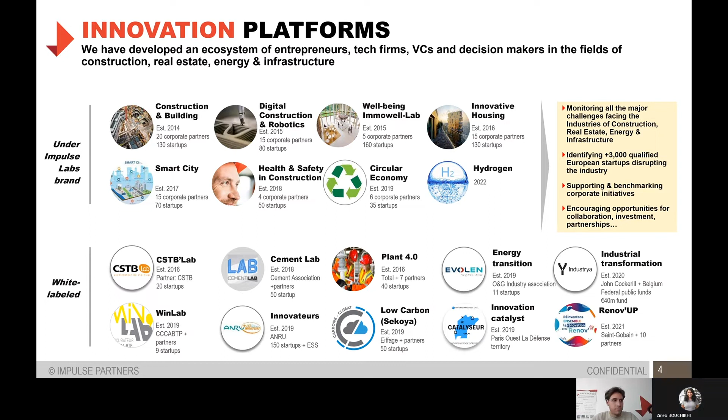We work with an important international industry leader group, and we've gathered over 3,000 startups that we help grow and accelerate their go-to-market strategy. So part of our job is really to bring together the whole value chain across geographies, hence why we're here today and why we created these Impulse Talks.

In today's session, we're lucky to have over 60 participants coming from 20 countries. So we really thank you for being here and taking the time to gather around such an interesting theme.

In today's talk, we're happy to have with us very interesting companies that are transforming digital construction. We'll first hear from Kurt Zeidler from Gall Zeidler Consultants, and then we'll have 5-minute presentations from 4 entrepreneurs based in Germany, Norway, and the UK. We'll finally close this talk with a few minutes dedicated to Q&A. To do so, do not hesitate to use the chat to ask any questions you might have for our guests today.

So we're glad to introduce you today to Kurt Zeidler, principal and co-founder at Gall Zeidler Consultants, an international engineering consultancy specialized in solutions for tunnel and underground schemes. If you have any questions during the presentations, feel free to ask them in the chat, and we will bring them up at the end if we have time. So please, Kurt, you can start introducing yourself and the company.

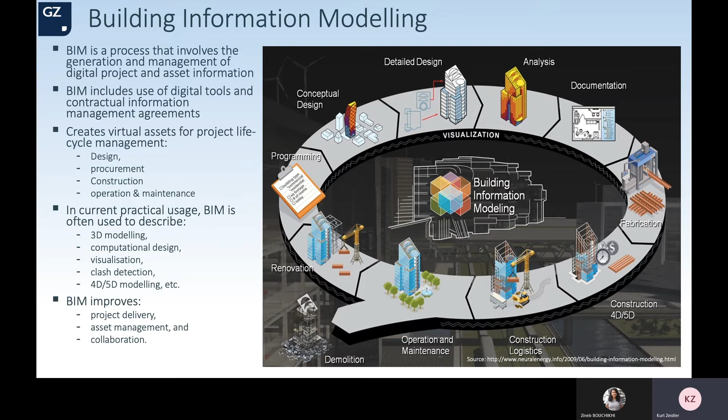It goes into clash detection up to 4D and 5D modeling, which is being used at some projects around the world. What BIM offers us is an improvement in project delivery, in particular delivery certainty, but also in asset management and in collaboration between various different trades during construction and before that, various different disciplines.

In the UK and in Europe, BIM is implemented more strictly following ISO 19650, which is a guideline for the procedure, for instance, storing all the information in a common data environment.

The common data environment is not just a dump for information and files. It's important to structure and organize it and manage it such that information can be obtained in an efficient and reliable way. It's basically a source of truth about the project.

If somebody looks up information on this common data environment or data storage, he must be able to rely on the information and that this information is the latest information. So that's all part of the management, and that's also guided by the ISO.

It also shows the procedure for a federated scheme, which is very important. A federated scheme means that all information flows together and is built with a 3D scheme, for instance, into a 3D model. So it's not only the 3D model itself, it's all the assets shown within the 3D model.

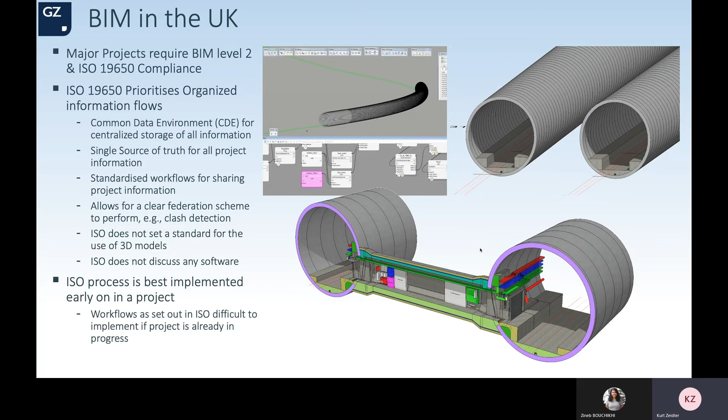But it requires a workflow, and it requires that workflow from the very beginning, and it requires rethinking about these workflows on all sides - on the client side, owner side, as well as the engineer side during design and during construction.

In North America, BIM is very often used. Many owners are still not using BIM, but some owners implement BIM sometimes at a relatively late stage in the project, which unfortunately doesn't provide the most benefit of BIM, but still uses parts of it, for instance for clash detection or for information on environmental situations and so on.

So there is a slightly different understanding, or different use of BIM in the States, but ISO is still a basis for all those approaches.

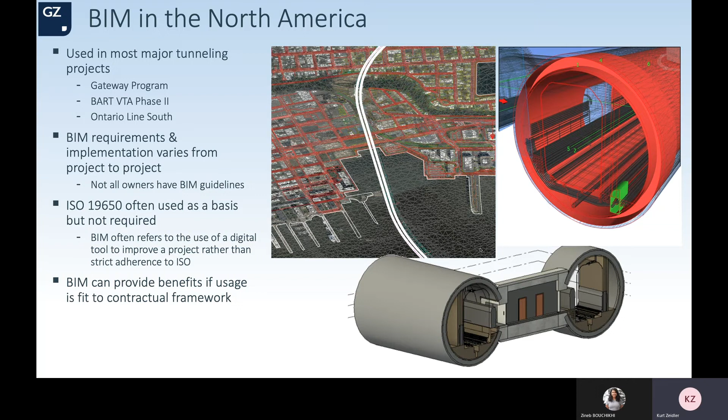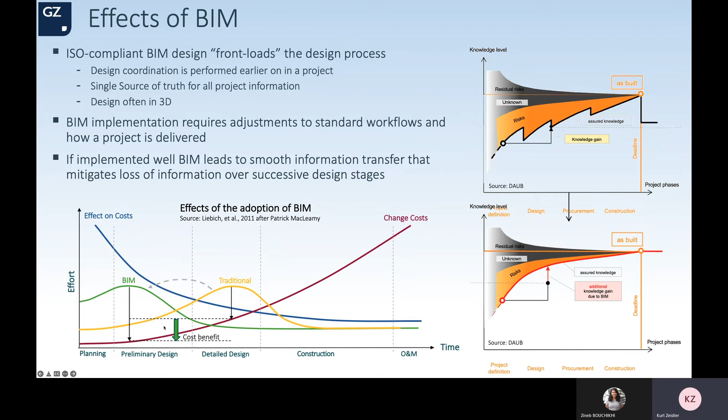So the cost benefit of BIM is that these changes, the errors, should be found relatively early, and the changes implemented early in the life of a project, where changes are relatively simple - by changing models, by changing digital information, rather than changing material out there or changing beams or something like that.

Another example is the use for clash detection. This is an example from a project in North America, where the client decided well into the project that he wants to use BIM for clash detection of his structure, and he wanted to bring all the architectural, structural, and other models together in a federated model, showing every element of the project and structure. Then through regular coordination meetings, find out clashes and problems where one discipline is affecting another negatively, or where a trade might come in later than required because it should come in earlier to do its work. So that's one understanding of BIM as well.

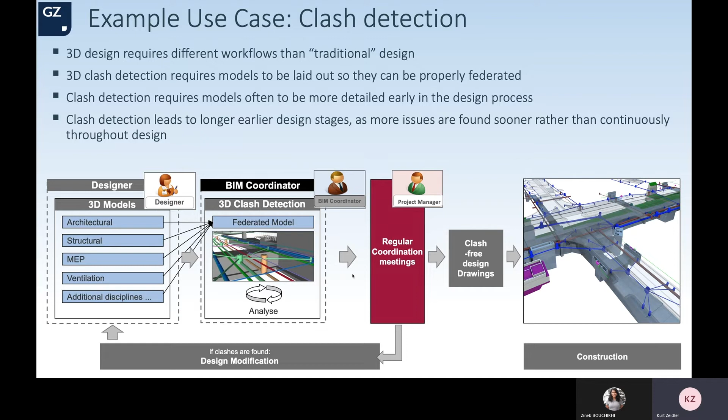We will have, of course, increasing computer power. We have all seen that rapidly developing in the past, and that will find its way into BIM modeling and improve it. Software developers continuously develop new software to more efficiently and powerfully use BIM models in future. But on the other hand, it needs standardization of BIM modeling, and I think that's probably a major task for the near future for engineers and clients, to standardize those procedures to make the best use of BIM.

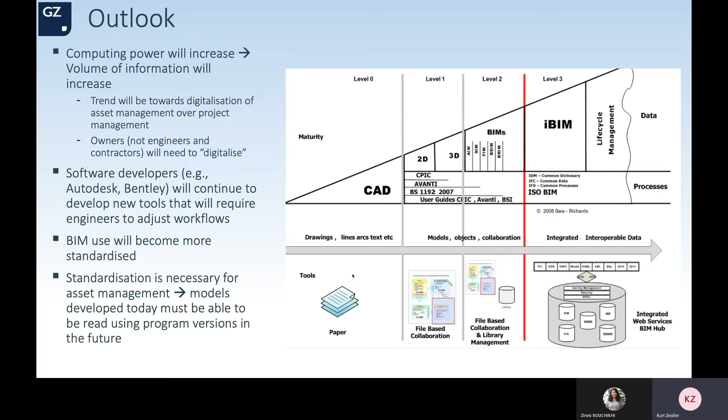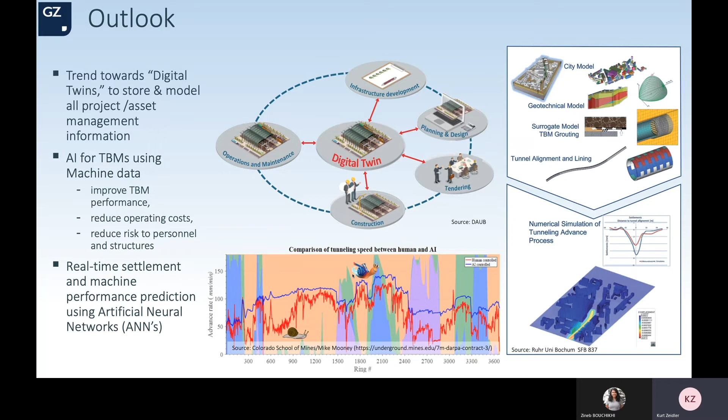As I mentioned at the beginning, there is more than BIM. There are other digital tools in construction, such as using real-time settlement monitoring and real-time monitoring of the performance of a TBM, which can then be used with the support of artificial intelligence to predict certain behaviors, to predict the performance of a TBM or predict settlements based on real monitoring data. That's important - it's not based on assumptions, it's based on real monitoring data. And that's certainly a very exciting part, only one part of the digital world which will be influencing the future of our construction.

So thank you very much. I hope everybody found something interesting in this. And I think that's it for my 10 minutes. Thank you.

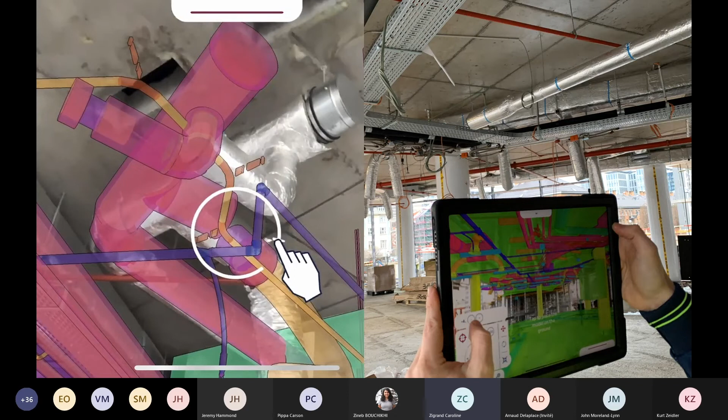GenieVision is a SaaS software solution that allows you to benchmark the 3D model against reality thanks to augmented reality - a virtual layer, the 3D, that interacts with the construction site, not only via a visual object but also via the data behind those objects, thanks to a mobile device. So the idea behind that is really to pocket the 3D, take it out from the design and conception phase, and build profit for the project stakeholders.

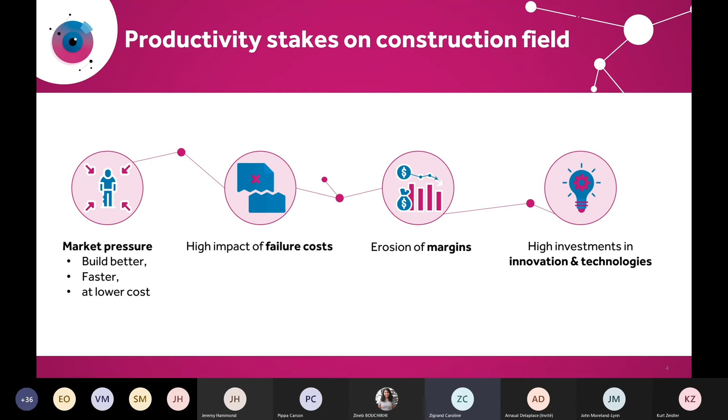So the project evolved keeping in mind the productivity stakes on the construction field. We understood clearly that there was market pressure to build better, faster, at lower cost, with high impact of failure cost, eroding margins, and also high investment in innovation and technologies, talking also, as Mr. Zeidler said, about BIM innovation. So talking about failure cost, we understood that there was a big part of the construction budget allocated to error management.

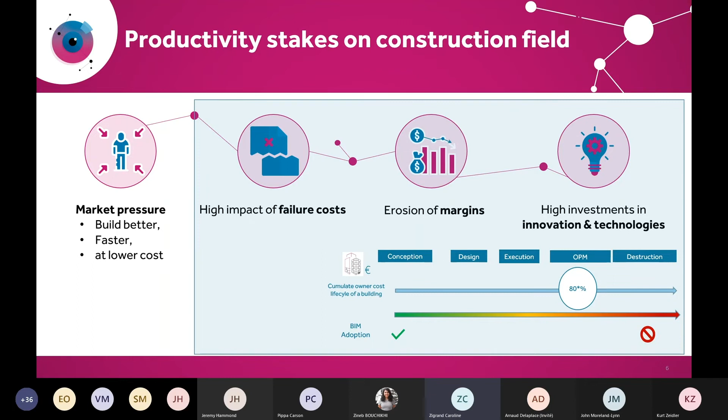And talking about BIM, we understood also that there was very good maturity at conception and design phase, while at execution and operation and maintenance, it is very low. And indeed, it is at that level that, if we look at the overall budget of a project over its life cycle, it is the most important. So GenieVision is really there to help slash failure costs and optimize BIM investment.

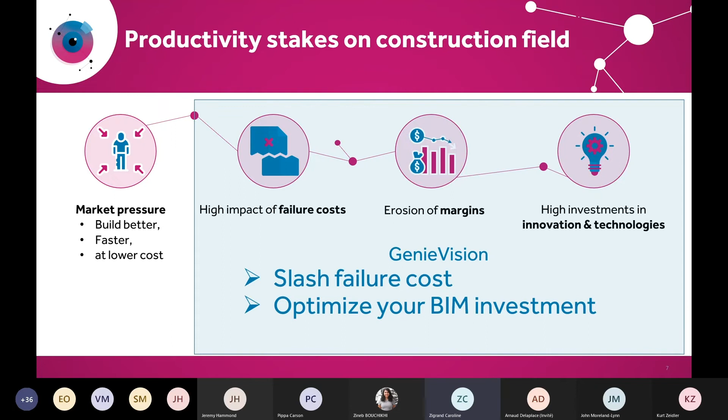This is done thanks to this smart viewer that is used for the entire life cycle of the building, from conception to operation, putting the solution in the hand of a modeler, site foreman, engineer, PMC, BIM, and operator. And we do it mainly based on three types of use cases.

The first type of use case is the possibility through our solution to monitor the execution, so make sure that what is executed is perfectly aligned with the model itself. We're not talking about 2D here, it's really the 3D. Make sure that the execution and installation is done correctly.

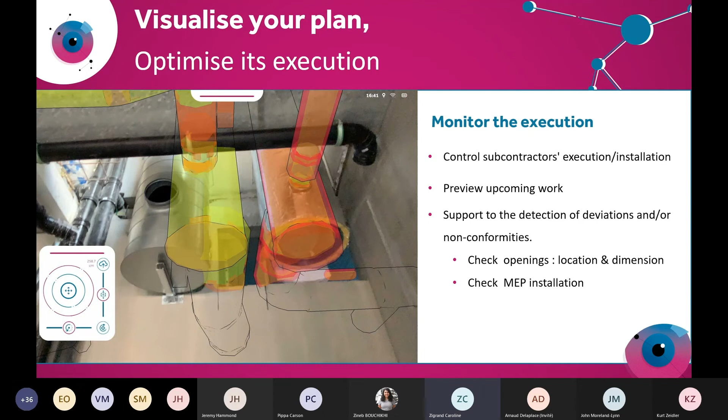Be able to preview the upcoming work and make sure there are no physical clashes, no clashes with the planning, and monitor all kinds of deviation. For example, in the openings: are they at the right place, correctly sized, is the number of openings correct. So it's really there to visualize the plan and optimize the execution.

The second type of use case is really the other way around: monitor the 3D model against the reality. There it's really about making sure we build a correct as-built and enrich the model based on better coordination. Let's take a concrete example of refurbishment of a project.

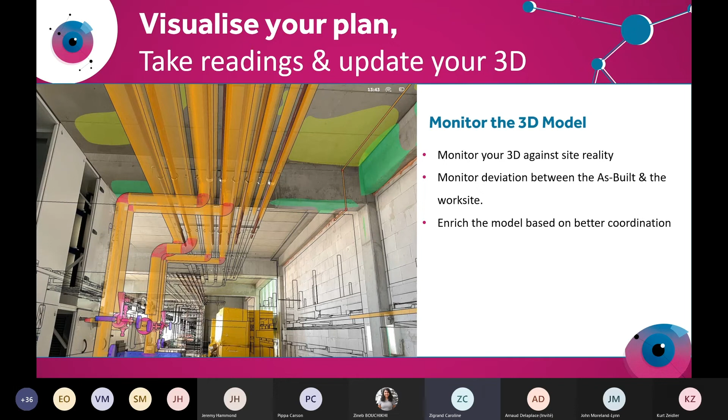We have created a 3D model thanks to scan technologies and so on, and we want to make sure we have the right model to then do the right bidding, the right assessment, the right coordination on site, and that we do not miss anything.

The third type of use case is collaboration and follow-up. Via GenieVision on site, we collect a bunch of information: visual, pictures with the 3D against the reality, the place where those pictures were taken, timestamp, who created it. This can be used to share information among teams, and also connect that information directly to the 3D model.

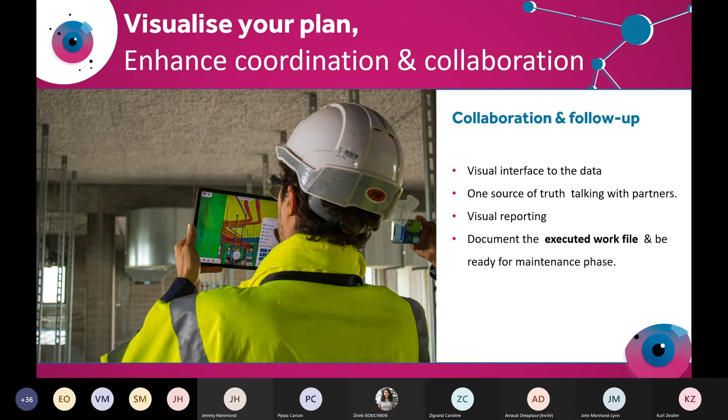So GenieVision's process is quite simple. You have a 3D model that you place on a portal, process it, and make it available through an application for the operator on site, who records the model, calibrates it, and does the reporting job by comparing the reality 3D and the on-site reality.

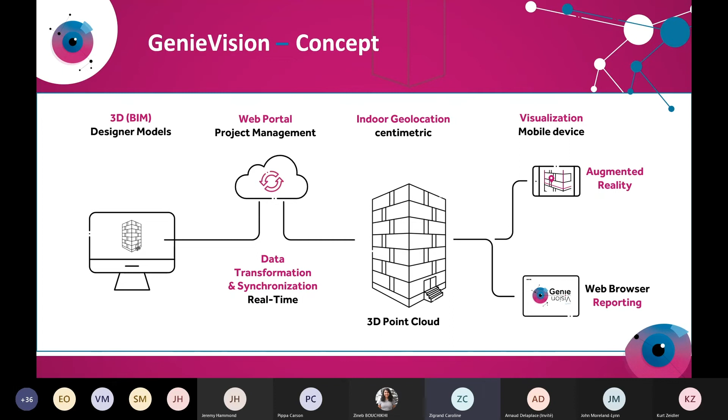Afterwards, everything that has been collected is available through the application and through the portal. Behind that concept, there are processes bringing 3D into augmented reality thanks to a unique high-tech process, avoiding any problem of sizes and using different types of format. The main ones are Revit and IFC.

We also make sure GenieVision is focused on its core product, which is the smart viewer, and that we are integrated into the existing ecosystem of our customer by providing an open solution that can be easily integrated with what already has been implemented on the customer side.

So if we take back the question raised at the beginning, we understand that this kind of solution via the smart viewer allows us to carry the 3D on site, benchmark this 3D against the reality, make sure this 3D conforms to what work is done, confirm the execution, and deliver at the end a digital twin that can benefit the project throughout its life cycle.

So it is done thanks to augmented reality, but we have in mind that we can go further with other embedded technology coming soon. So do not hesitate to ask questions at the end if you have any, or to contact us. Thank you.

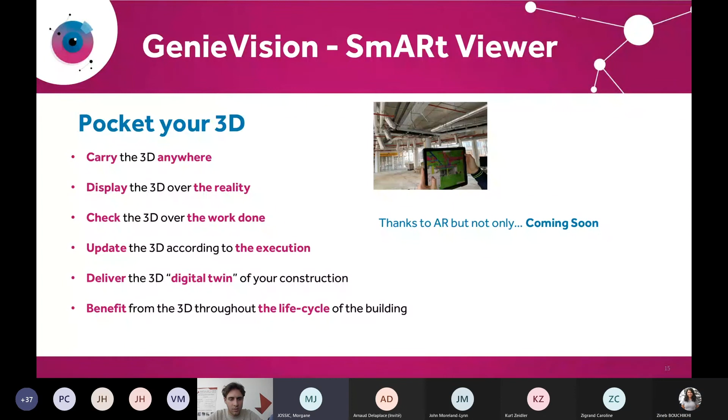Do you still see my screen? I will share it again. No, we can't see your screen. Currently it's blocked. Do you remember what the slide is, the slide number? Yeah, so here.

Okay, so our customer, for the moment, we are really focusing on talking to site foreman and engineer, allowing the site foreman to do, as I said, the first type of use case: be able to control what has been executed on site, do snagging, report any kind of non-conformities, and afterwards push it into a work progress flow.

And the second type of users that we have focused on is the engineer working on the BIM, who are looking in their mission to support either the customer or the general contractor to have an up-to-date as-built. So that's the two main focus for the moment.

Of course, we can even go further and help the user in the operation and maintenance phase, helping them get access to the data we collect throughout the previous phases, and also, thanks to the 3D model, be able to locate where the different installations are, access visually what is behind the wall or behind the ceiling, and access the data linked to those different objects.

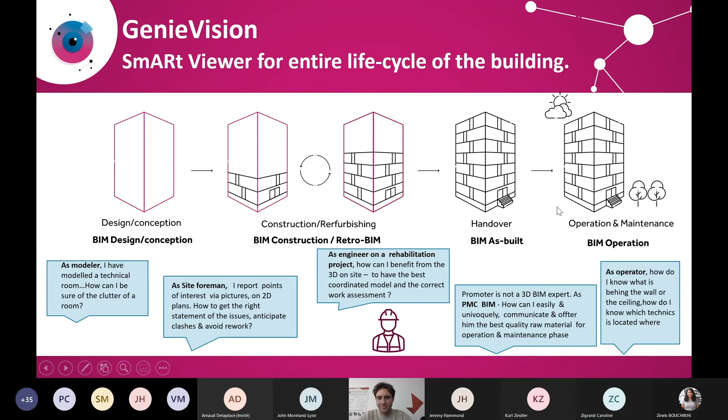Hello, Philippe. Hi, good morning, good afternoon to everyone. I see we have a lot of people here waiting. So I'm going to share my screen now, and we're going to look at VREX.

Here we go. There you go, can you see my screen? Yeah, okay cool. All right, so I was told I had 5 minutes to present VREX. I usually take 1 hour, so I'm going to make it real short and sweet.

So what VREX is about is virtual reality for projects in BIM. And basically, we work on collaboration in VR, but not only.

We have a few customers already working with us. Some you know already, of course, like Bouygues, Artelia, NCC, Schlumberger, Bosch, etc. Those guys are using VR and VREX on a regular basis now, some of them on a daily basis and on many projects.

So basically, those people have actually integrated VR into their BIM process, where they design and collaborate with many people to make the project as good as possible before they even start building anything.

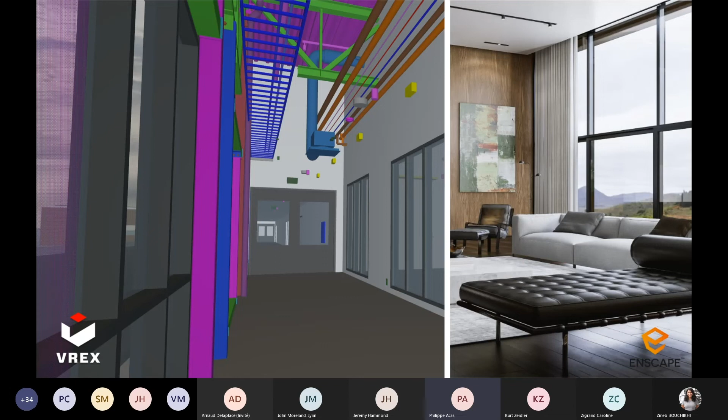You can join, of course, with a VR headset. You can join from a standard laptop as well. If you have a laptop, you will be also with an avatar that looks like a little PC. And you will be able to fly around and point at things and measure, take pictures, access data. You can do everything as much as the other ones. You're part of the meeting.

And so in VREX, you are all together in the same room. We call it VR room. And you're all together in there and you collaborate. You click an object, you got the data, you open a BCF, and then you can fly and just teleport yourself to that particular place in the model. You can teleport everyone. You can teleport yourself to someone else. You can teleport this guy to you. And you can just collaborate, and everybody's sharing the same view.

You can just discuss about the specific case. And in VREX, you make a decision. You decide, yes, we do this, no, we do that. You get information, you connect with some other guys, and then you get things done. Basically, a decision-making tool in VR.

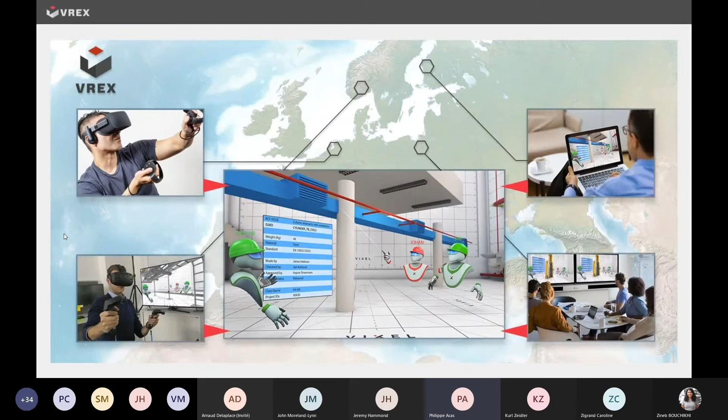So if you haven't tried VR before, it's difficult for people to understand the effect of being in a virtual reality on a scale of 1-to-1, because you really are in the building. So it's really important to try if you haven't tried yet. I really encourage you, if you have an opportunity, put the headset on, go into a model, and you will see this is another world, really.

We talk about digital meetings, okay, and VR can be used with many use cases. I just made a couple here, but there's many use cases. One of them is really nice: when you need to talk or get the feedback from people who are going to use the building.

For instance, the nurse on the bottom there, she's going to work in a hospital and she's going to have some specific requirements about how she's going to handle her job every day. If she's not a BIM user, she doesn't know 3D modeling, and it will be difficult for her to understand a 3D model on the screen. But if you put a headset on her, then suddenly she can definitely see, oh, this is how it's going to look like, this is how I'm going to be able to operate. She can give you feedback, ask questions, and validate some points, or just create an issue that says, hey, we have an issue, this cannot work for me because of this and that. And you don't know because you are a really good engineer, but you're not a nurse, right?

And the same goes for people in many different kinds of buildings: students, teachers, operators in a factory. Many people can actually have their own feedback that will help make the model even better than the one designed by the first engineers. So this is one of the use cases: non-BIM users use VR to give you feedback, input, and validation.

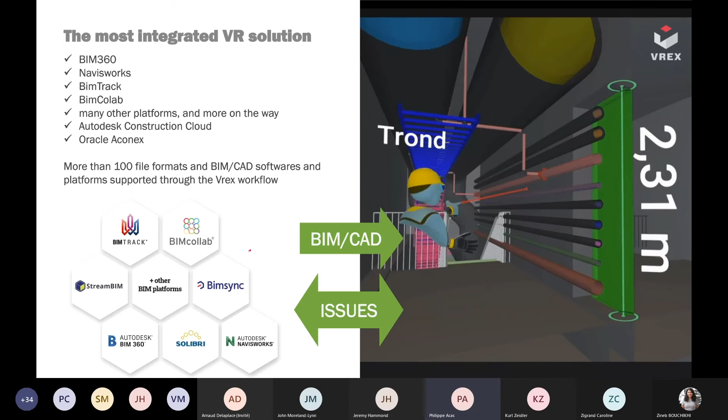So you can open an issue that you created in BIMtrack, for instance, in VREX. You can make a decision, a comment, or whatever. And if you find something different, or find another issue that was not detected before, when you are in VREX you can create an issue, a BCF, and this will be automatically registered in your BIM platform too. So this is totally integrated into your BIM process, okay? This is not something on the side. I could talk about it forever, but this is the main principle.

Another thing is we have the capacity to use point clouds, like we saw before, but that's in VR. Point cloud is used in two main cases. One is for industry. Very often in industry there's a lot of machine replacement and change of production lines, so what people do now is make a scan of the actual production line, and then make models of the new equipment or the new building extension they want, and compare both in VR to see if everything is correct.

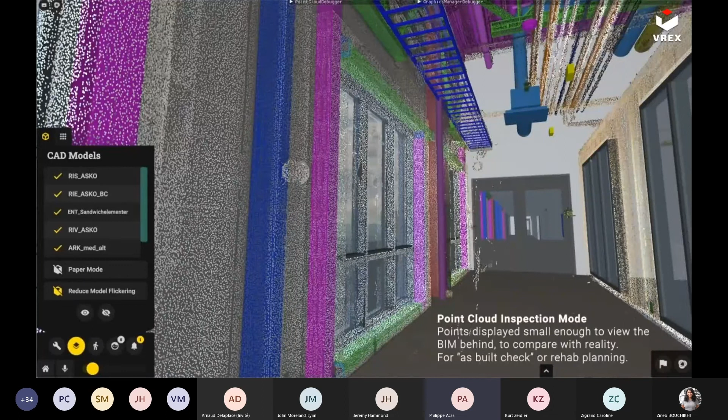Another use case, of course, is as-built. You can check with the point cloud if it was correctly done compared to the model that was designed before. So either rehab or just retrofit, like in the industrial world here, where they scanned the production line, created this new equipment, and made sure it was fitting with the rest of the existing equipment. So that's one of the use cases we have.

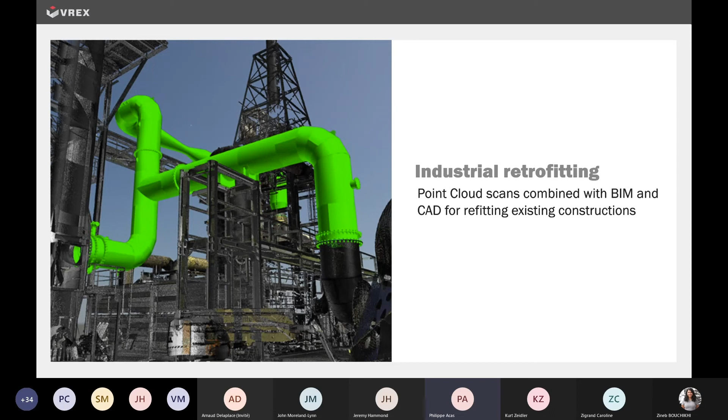Another use case, one out of many, but I took this one. It's called Universal Design. That's a case in Norway with Statsbygg. This building was supposed to be really good, and someone found out there might be some issues when it comes to access for people on a wheelchair. It happens that Tim in Skanska is also a BIM manager and is also a wheelchair user. So they decided to ask him to check the full model.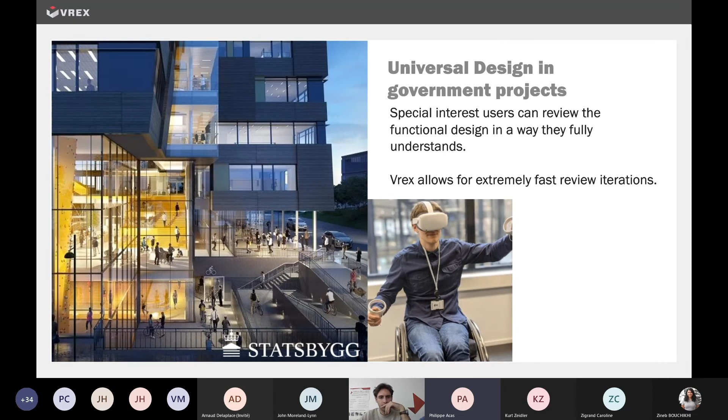And it was a big meeting. There was a lot of people involved, even the officials. Kim was leading the whole session, and he was, of course, in VR. And this is what he found: after 2 sessions of 1 hour, he found something around 50 issues for access for wheelchairs in the building—any places, locker rooms, toilets, exits of elevators, just to name a few.

So there were a lot of mistakes, and because this is a public building, it had to be totally accessible for people in a wheelchair. At the end of the day, they had to reshuffle and redo a lot of the design of this building, and they saved a lot of money because they would have had to do it anyway if they'd built it this way. So they saved a huge amount of money just using this 2-hour session with Kim.

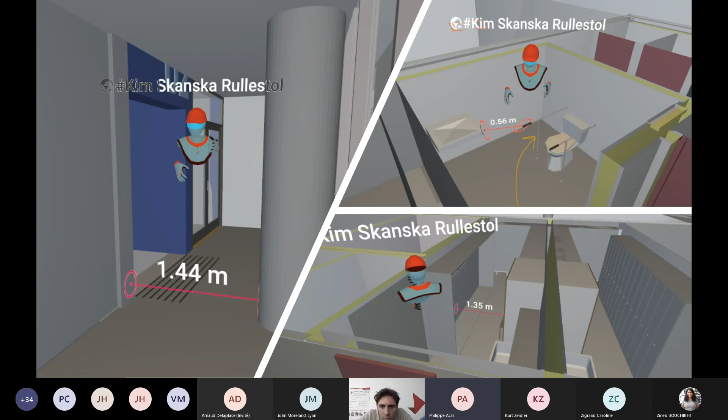I think this is it for me. I hope I stayed within my 5 minutes.

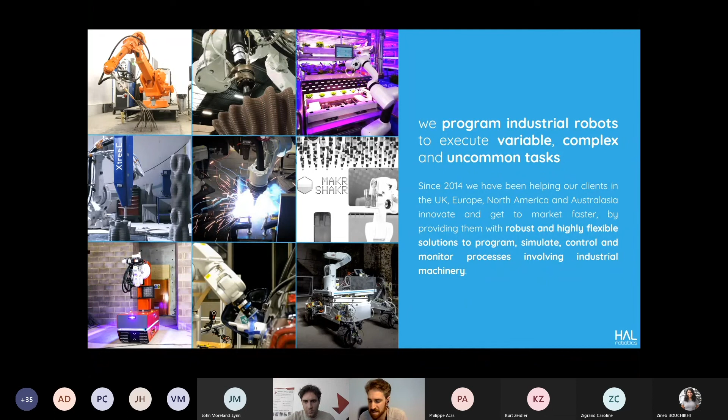We specialize in the programming of variable, complex, and particularly unique tasks, be that 3D printing construction elements, all the way to throwing and catching cocktails. Our unique approach allows mass customization of components, be they in metal, timber, or concrete.

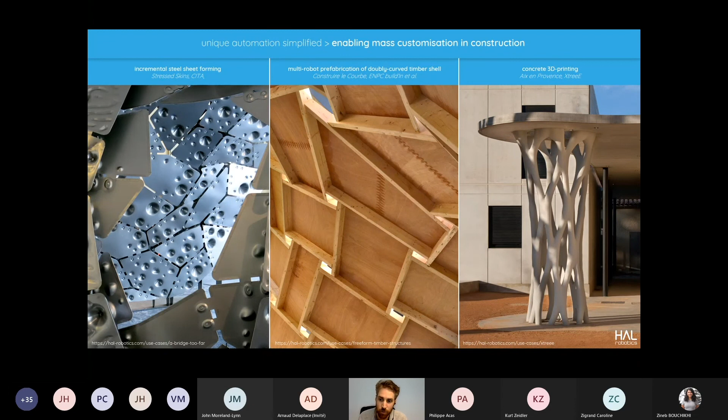On the left here, we have a sheet metal deformation project by CITA, part of the Royal Danish Academy, in which a robot presses repeatedly on a sheet of metal to change its shape and add some structural integrity. In the middle is a doubly curved timber structure in which every single beam is uniquely machined to keep those flat panels perfectly flat and planar. On the far right, we have a 3D printed column by XtreeE, for a school in Aix-en-Provence in the south of France.

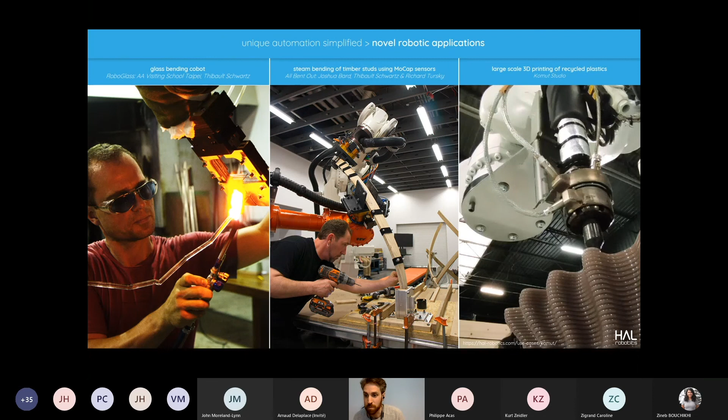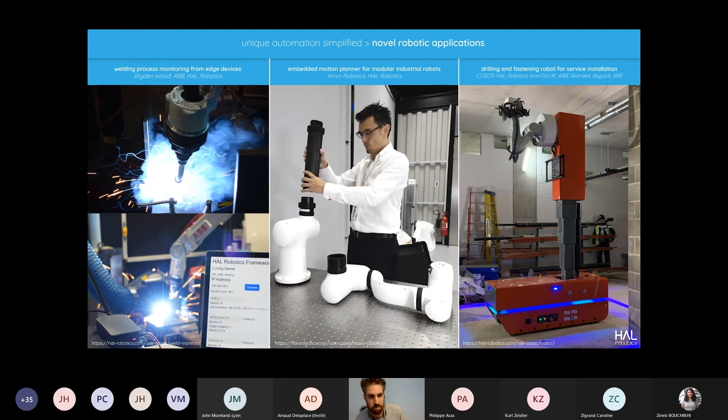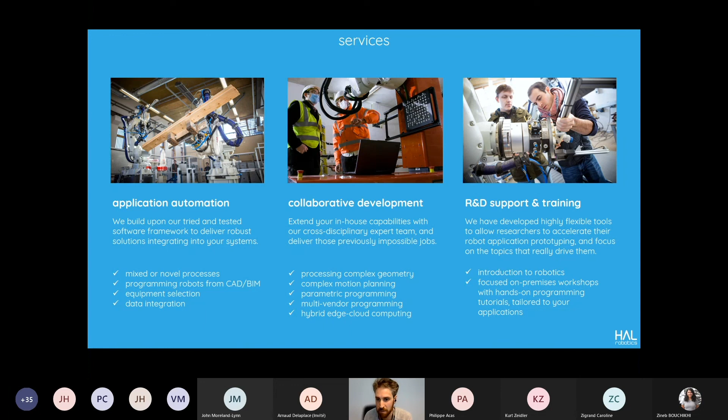We offer our clients a full range of services to cover their needs regardless of where they are on their automation journey, from exploring where automation could fit into their current workflows, through to equipment selection, automated reprogramming tools, collaborative developments, and of course training once everything is actually set up and running.

Our services are all based on a proprietary software we call the HAL Robotics Framework, which covers full robot programming workflows: cell modeling, toolpath creation, motion planning, simulation, code generation, as well as inter-device communication for code uploading and adaptive programming—getting that feedback back into the loop and changing what the robot's doing in real time.

We've designed that framework from the ground up to run anywhere from low-powered edge devices, as we saw with the welding example, all the way through to being embedded into CAD software and even pushed up to the cloud into containers and distributed into scalable applications.

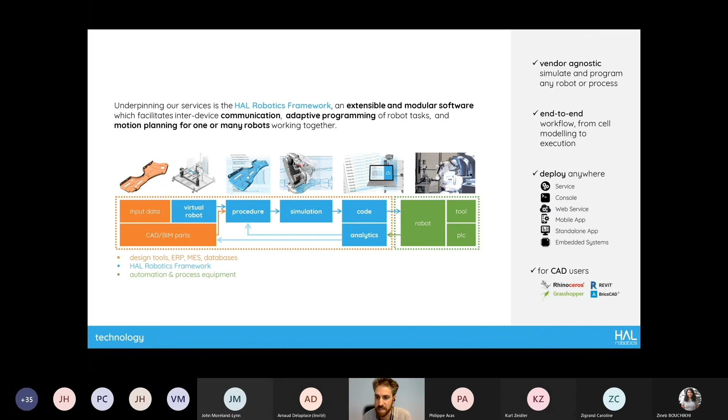Over the past 7 years, we've had this technology out and about, and it's been used to deliver solutions for multinationals and SMEs in aerospace, construction, automotive, food and beverage, and many other industries, as well as supporting fundamental research at some of the world's top universities and research organizations.

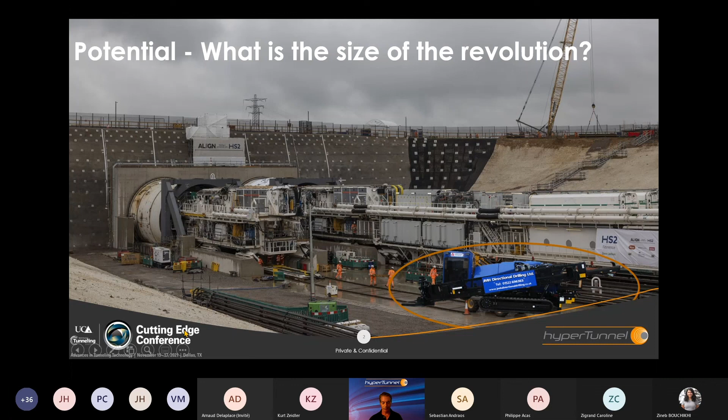This is the biggest piece of equipment that we will use in our more modular approach to building tunnels. We start from the beginning in the preparation phase, where traditionally you would do core samples vertically at intervals of up to half a kilometer, which shows that a lot of geology is not seen on the tunnel path. Whereas we take a horizontal directional drill with core sample and go through the entire tunnel path, making sure that we can see everything.

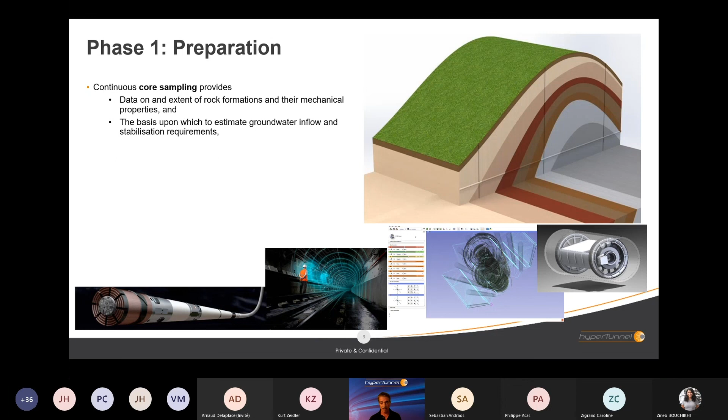Then we use equipment that we've developed in-house, such as seismic and ground penetrating radar, to create a digital twin, like Kurt was saying earlier, in a BIM model. Kurt's been working with us, by the way, for the last 3 years, and we will be able to identify everything along that tunnel path and use virtual reality goggles so that you can walk through the virtual tunnel before it's even built.

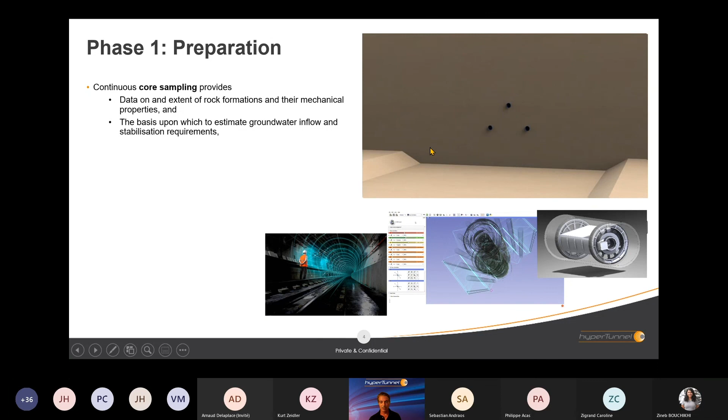So here's our horizontal directional drilling equipment, putting some exploratory bores in to get the geological analysis. Then we use the same equipment to create the tunnel shape. Instead of a TBM that is only round, we can make it round, D-shaped, square, rectangular—whatever the client requires. So it's very flexible, and it can be any size you want, any length you want.

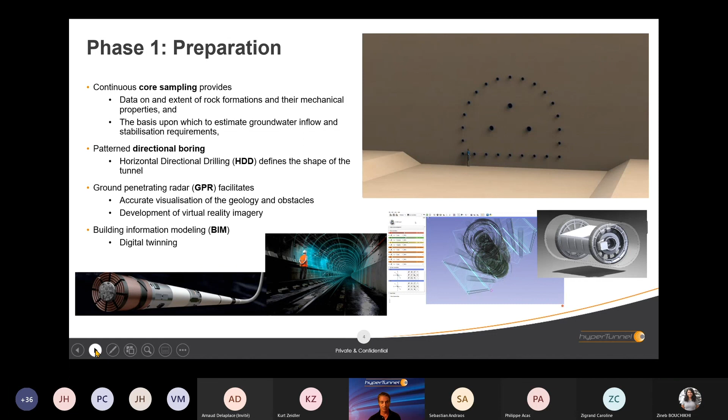This is the fun bit. So once we've installed the holes and we put a plastic pipe in, we then use swarm technology. Swarm technology has been around in nature for millennia—ants building ant hills, for example.

These are some examples in industry. This particular photo is of a grocery packing plant in the UK from Ocado, and their head of engineering has just joined us to be our robotics engineer. Robots have been used in tunnels for years as well, but usually these tools inspect pipes or tunnels—they don't actually do anything.

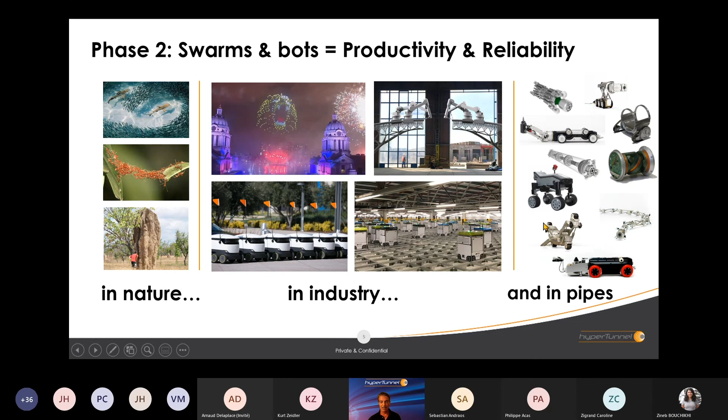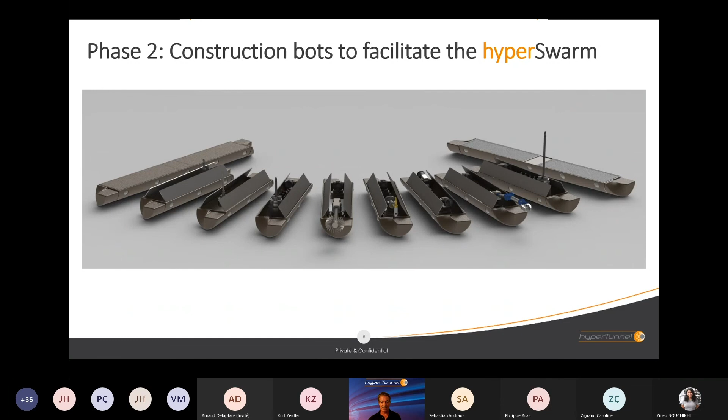The difference with our robots is that they actually use the pipes to go outside the pipes into the geology. You'll notice they're half-pipe shaped, so that they can pass each other inside the pipes. Here's some bots passing each other inside the pipes as a swarm.

We might have hundreds or even 1,000 of these in our pipes, but they cost about 500 euros each. So 1,000 bots at 500 euros each is €500,000. And that TBM I showed you earlier costs between 10 and 50 million euros each, and can only go down the tunnel, building it one step at a time, at 10 to 20 meters per day. Elon Musk has said they're 14 times slower than a garden snail.

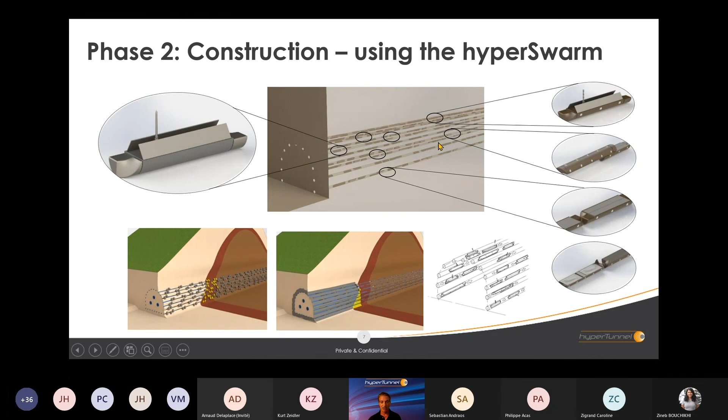Our bots can build the tunnel simultaneously from all directions. What we do with the bots is we first analyze the geology, then we use a drill bit that goes outside of the pipe into the geology and creates the outer shell using construction chemistry. It's been around for ages.

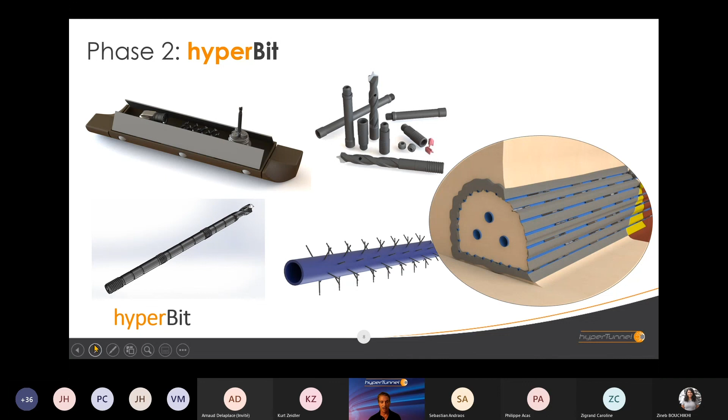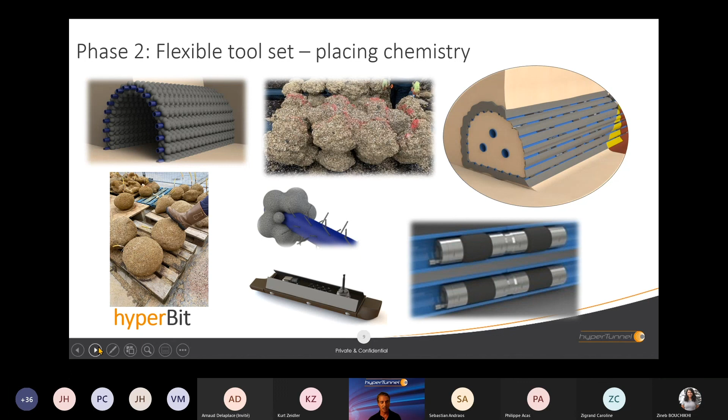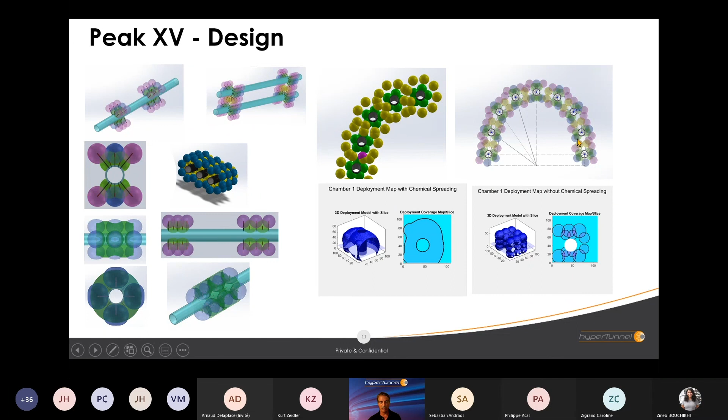These are some of the plumes that we've built. We inject plumes and put them together, built as building blocks. They're very, very strong, as strong as structural concrete. And we don't just do them in a random fashion. We use artificial intelligence and create a digital twin of what we are going to do and what the robots are going to build.

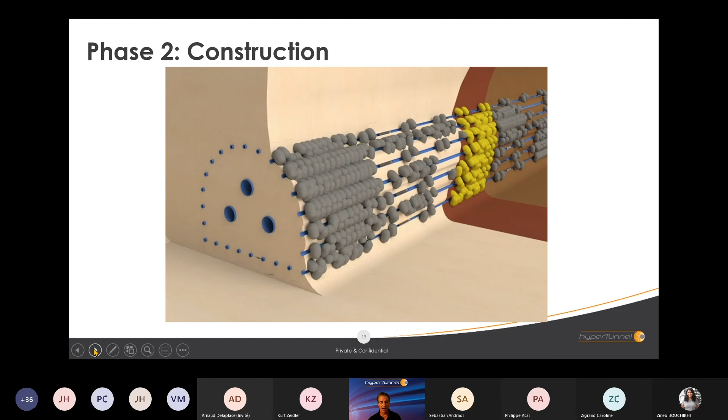This is just showing that there are different sequences as well, what the AI tells the bots where to put the plumes. And once we've built the shell, as you see here, we can then...

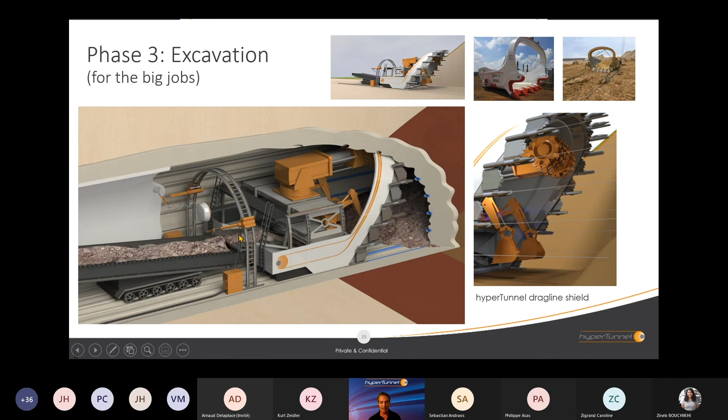...disrupt the geology and make it very easy to excavate with a machine like this. This is autonomous - it drags through and takes out the excavated material on a conveyor belt. You'll notice nobody has been in the tunnel yet, no humans, just autonomous vehicles.

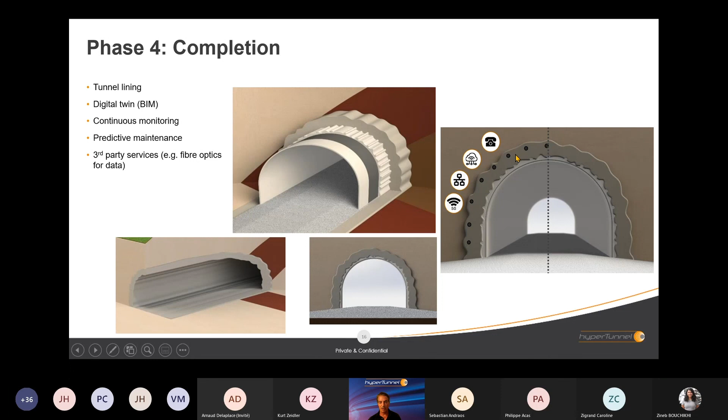The final phase is to finish the tunnel with whatever completion the client requires, and we can leave behind the surveying equipment for the life of the asset.

We don't just build tunnels, but we can also enlarge, repair, and monitor, as I said. And we are looking at transport, utilities, underground assets, and mining. And I think that's my 5 minutes.